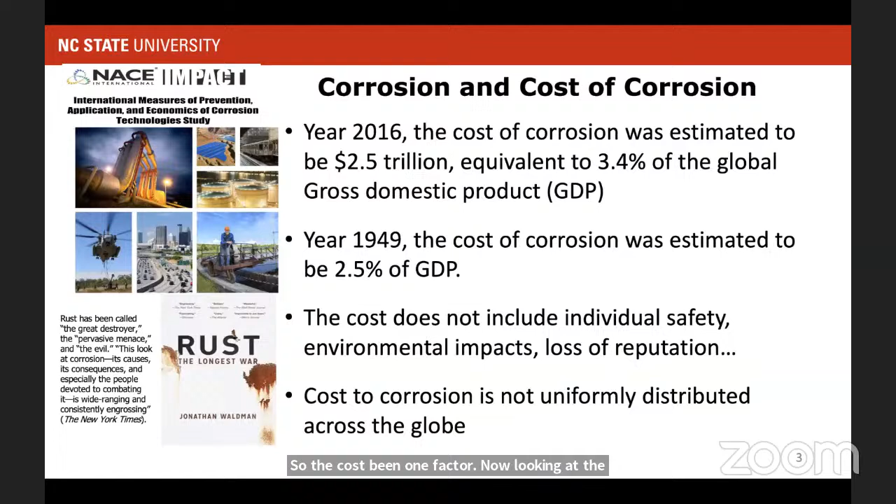Now looking at the sustainable future and environmental issues, and how we can fight global warming and those kinds of issues - a lot of people are working on new clean energy generating systems. From the material perspective, what we really need is material which can give really high fuel efficiency, and the way we can do that is by making the material lighter, for example using magnesium or lighter materials like aluminum. But there are challenges, and corrosion comes in there.

One of the big factors not allowing use of magnesium is corrosion. They're a very active metal and corrode really fast.

Recycling and reuse is really important - whatever we use, we need to be able to recycle and reuse. We think metals are really recyclable, but in reality a lot of metals are not. Looking at aluminum flying in aircrafts, there's so much aluminum flying in the air all the time, and once it comes to recycling, it's really hard. Recycling aluminum into high performing aluminum alloys again is really challenging, and corrosion comes into the picture there - you have iron impurities, and they cause huge corrosion issues. We'll talk a bit about that today.

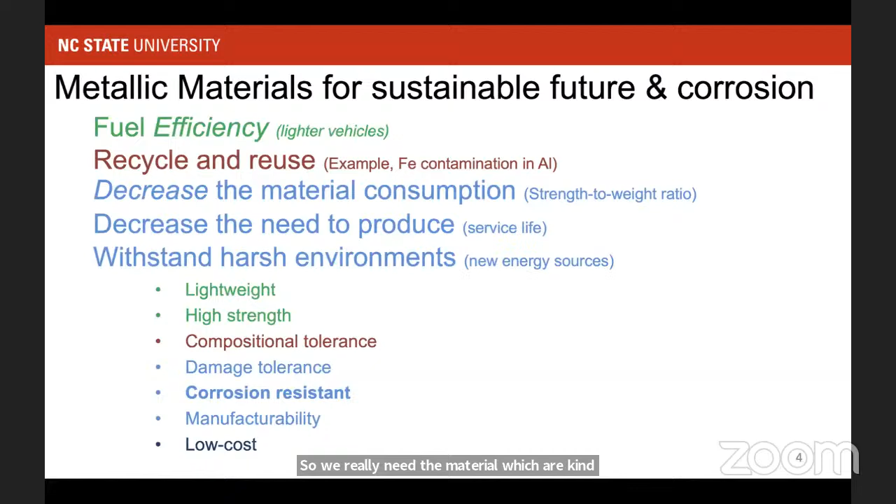So we really need the material which can withstand those corrosive environments. What we need for the future is a material that will be energy efficient and provide what's needed for future energy generation. It should be lightweight, high strength, with huge compositional tolerance. A lot of time we look at a material, but there is a very fixed composition, and a little change in the composition causes a huge difference in the properties. Having such material becomes very difficult to recycle. So having huge compositional tolerance helps in recycling and decreasing the need for a lot of material. It should be damage tolerant, corrosion resistant, manufacturable, and again we don't want to pay a lot of money for that. So we really need materials that go well beyond whatever commercial alloys we have today.

Looking at the options we have, just the pure elements, and looking at density or weight, if you look at aluminum here, you see 2.7 grams per centimeter cubed, which is one of the light metals. Magnesium is 1.84, which is again a good candidate material, but corrosion is a main issue.

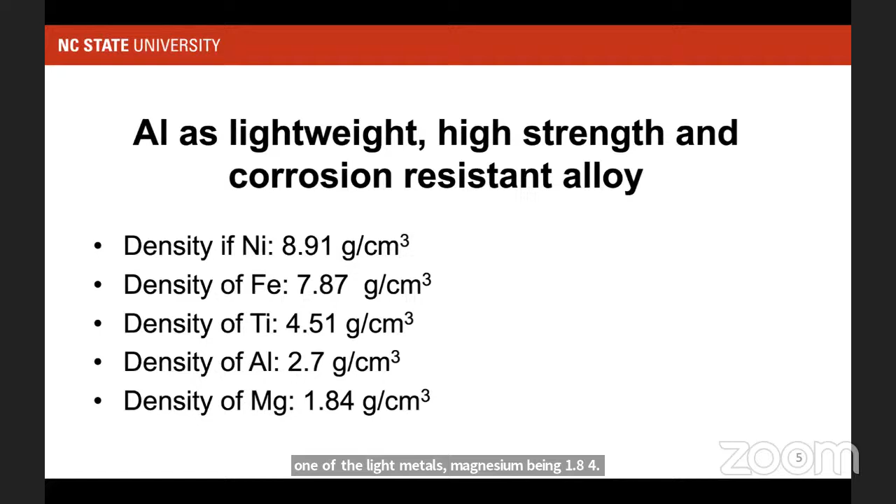So let's look into aluminum, as one example. If I take aluminum and look at its corrosion behavior, aluminum is a very reactive element. If you put aluminum in air, it immediately forms a thin oxide layer. We call it a passive film, and that's a barrier that separates the atmosphere from the metal and prevents the metal from corrosion.

Looking at the Pourbaix diagram on the right hand side, this aluminum oxide, when formed, is pretty stable at very high potentials. But the problem occurs if you have salt present in the environment, like sodium chloride. What that would do is break down the passive film. Once the passive film is broken down, you form a pit that could grow or could repassivate. So these materials are prone to corrosion, but due to that passive layer, they perform okay.

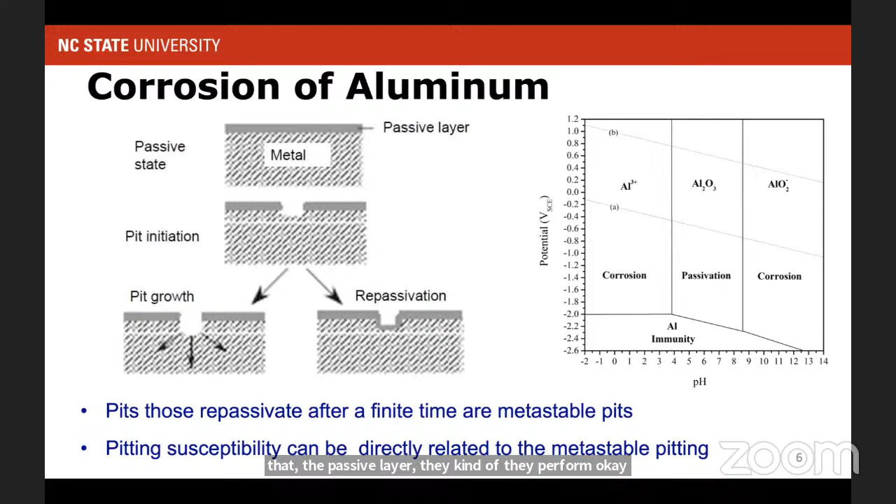You can take pure aluminum and use it in naval applications, and it would be fine. You can make ships out of it and they would be fine. But the main challenge with aluminum is that pure aluminum is very soft. So what we do is, sorry for this busy slide, but what I'm trying to show here is that we try to improve the mechanical properties of this material to make it useful.

Being very soft, with about 25 megapascal yield strength, pure aluminum doesn't allow it to be used in a lot of engineering applications. So what's been done is we develop a huge range of aluminum alloys, divided into 1000 to 7000 series alloys. You see the properties vary from about 70 megapascal up to 380 to 620 megapascal.

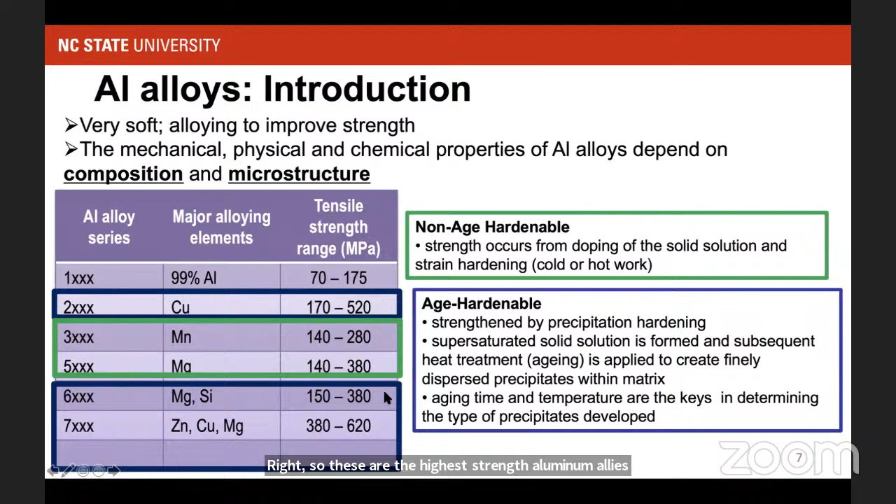And also 2000 series alloys are used in some applications in aircraft, right? So these are the high strength aluminum alloys. Now, the way we get strength in these materials is basically by precipitation hardening. We introduce additional phases. And if I look at this microstructure, how the microstructure varies if I increase the strength of the material. So you can think about this first image here.

If you see my cursor here, that's a pure metal, right? So we don't have any particles present, and the corrosion resistance is pretty similar to what pure aluminum has, right? And now as we add alloying elements, what they do is form some additional phases. You can think about these little particles present. So if I look at the far right hand figure, you see lots of these blue particles present. We call them precipitates. They could be a few nanometers in length scale, and they are closely spaced, and they provide all the strength.

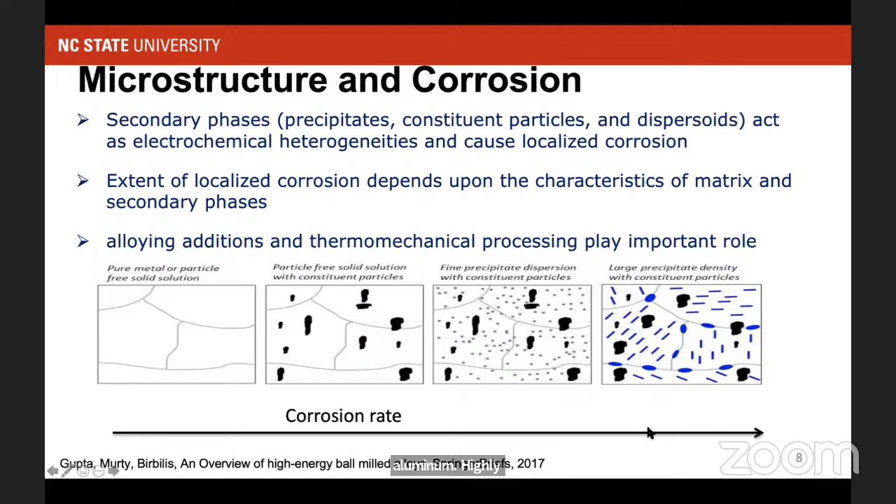So they are needed. But from a corrosion perspective, their electrochemical properties are very different than the matrix, and they interact with the matrix, and they cause localized corrosion, and the corrosion becomes a huge issue. So I take pure aluminum, highly corrosion resistant. I go to 7075-T651 we use in aircraft. That has huge corrosion issues, right? So as we increase the strength, we decrease the corrosion resistance.

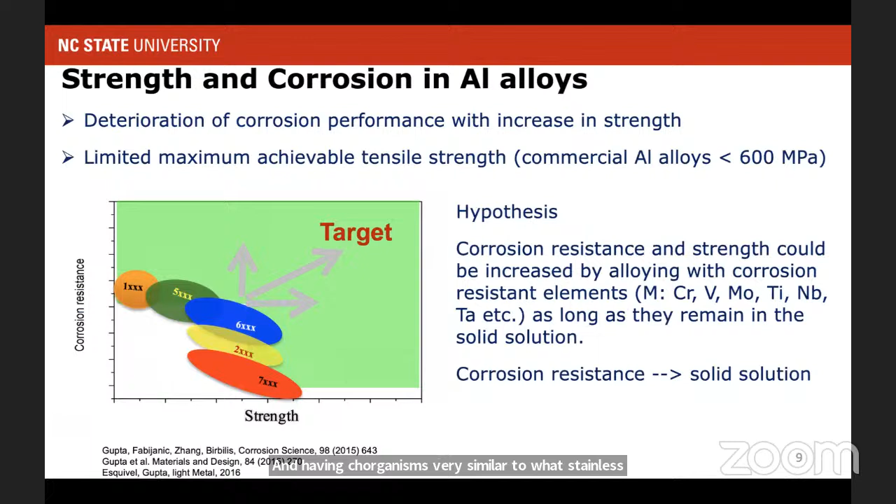So if I plot corrosion resistance as a function of strength, and it's a very qualitative map, what we'll see is that as you go from 1000 series to 7000 series alloys, you're increasing the strength, but your corrosion resistance decreases a lot, right? Now, what would happen if you can make alloys which have really high corrosion resistance, and also very high yield strength? So the target being a yield strength more than a gigapascal, and corrosion resistance very similar to what stainless steels have. And so we put some of our hypotheses together, making a solid solution, and I'll go over it and see what we get, right?

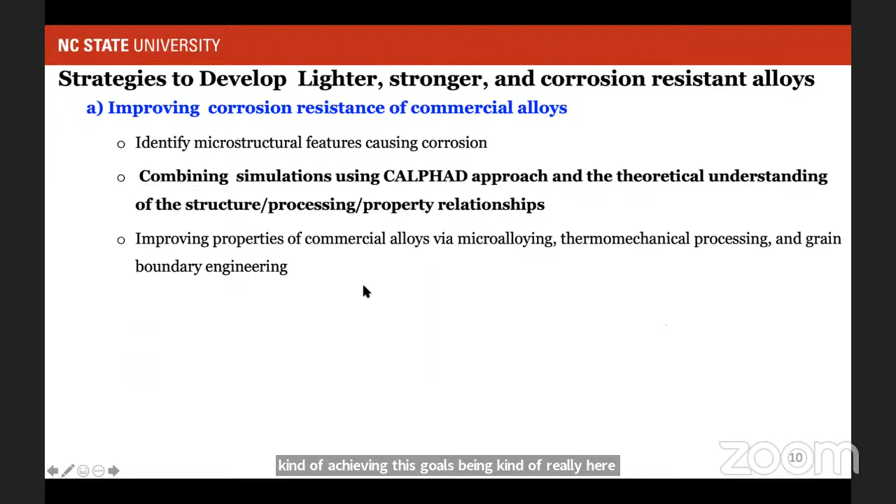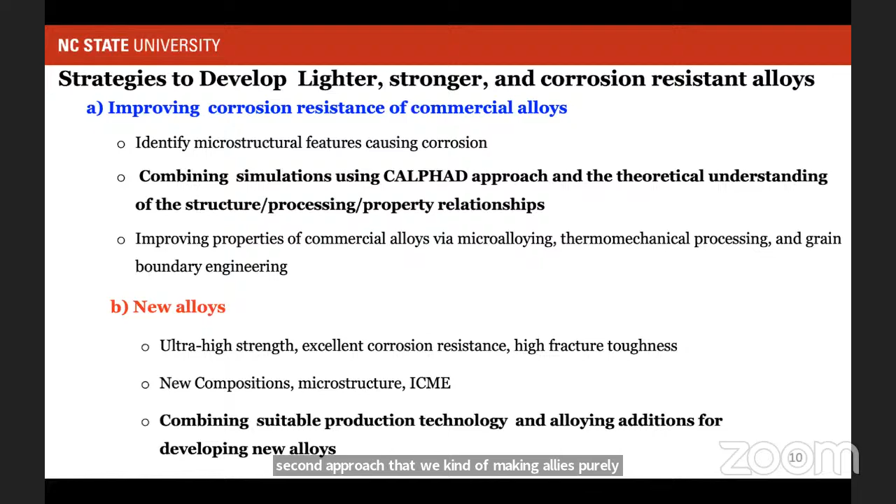But I'll give one example here that shows how we can work on the commercial alloys and solve those very specific problems. So here is one example for 5083 aluminum alloys. This is an aluminum magnesium alloy, used quite a lot in making ships and things like that, right? And this particular alloy has 4.5% magnesium and a little bit of manganese. And the alloy is highly corrosion resistant.

But once we put it in service and the temperature exceeds, say, 50 degrees centigrade, the supersaturated solid solution of aluminum magnesium decomposes, and an anodic phase we call Mg2Al3 precipitates at the grain boundaries, and then the grain boundaries corrode, and you have huge intergranular corrosion issues, right? So what we did is look into the problem, what are the key factors which control the corrosion, and we identified that the size of the particles matters, the composition of the particles matters, and things like that. So we said, how can we solve those specific microstructural problems and enhance the corrosion resistance?

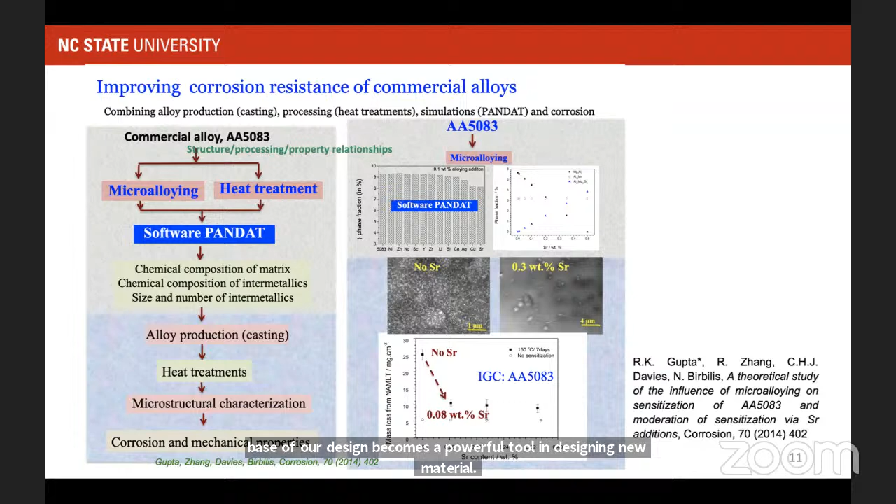So that shows how we could improve the corrosion resistance, and these thermodynamic calculations combined with our knowledge-based alloy design become a powerful tool in designing new materials. But again, in these cases, we're making incremental changes in the properties. Now, making a huge difference and going to the property limit, which we suggested as a gigapascal of yield strength and corrosion resistance similar to stainless steel,

we started looking at a whole new compositional range, and I'll give an example. Can we think about stainless aluminum? Think about iron chromium alloys, which are the base for most stainless steels. In iron chromium alloys, iron doesn't have good corrosion resistance, but chromium is very corrosion resistant. At the same time, chromium is a very active metal, right? As you put it in air, it forms a chromium oxide layer immediately.

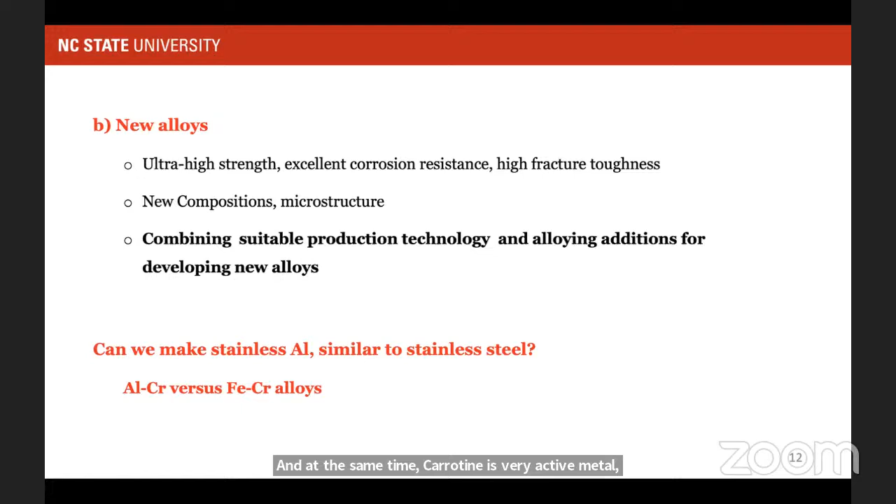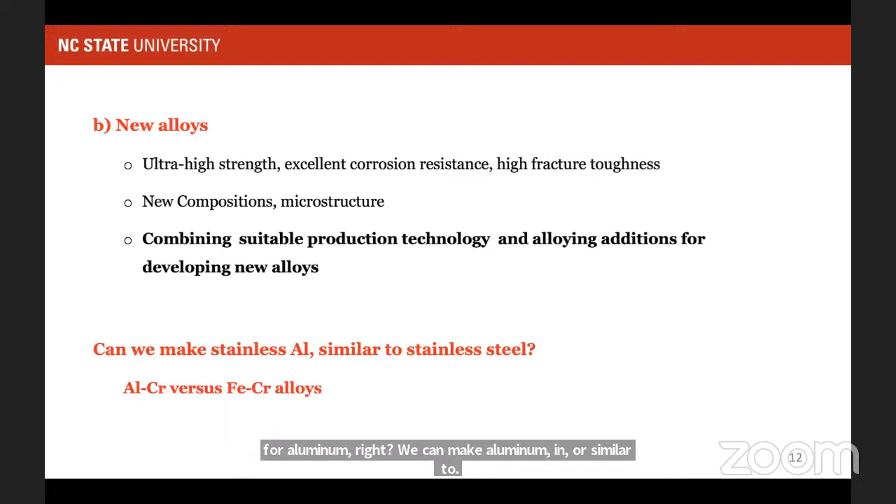Now, if I make iron chromium alloys, iron dissolves, chromium stays as chromium oxide on the surface, and eventually forms the chromium oxide layer that gives all the corrosion resistance. So it should be a simple phenomenon. We can do that for aluminum, right? We can make aluminum chromium alloys, similar to iron chromium alloys, a whole aluminum series. But the problem here, looking at the phase diagrams, say aluminum molybdenum or titanium, the biggest problem is the solubility of these elements, right?

So what we did was take the whole periodic table and put in the maximum solubility of different elements. It's a color coded map. Let's take one example like chromium here. The maximum solubility of chromium is like 0.77 weight percent. Vanadium is 0.4 weight percent, and these are the maximum solubilities. For example, vanadium's maximum solid solubility is 0.4 weight percent. If I go to room temperature, this drops down to like 10 to the power minus 7 atomic percent.

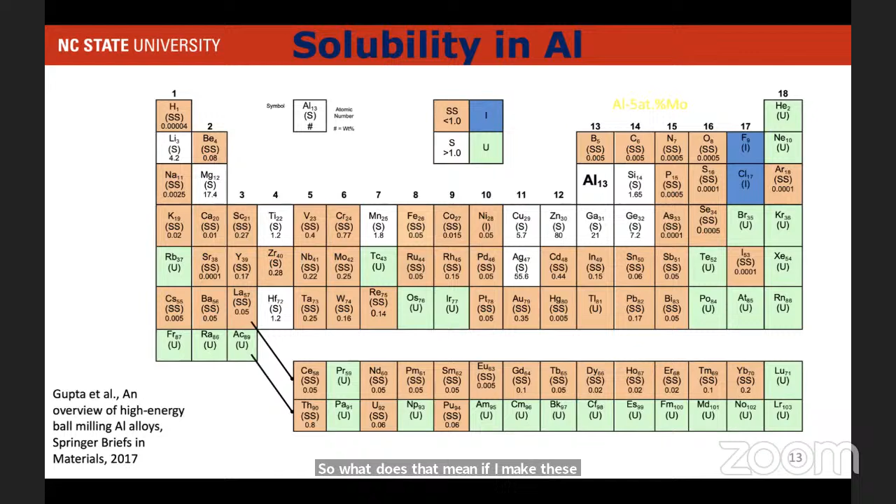So what does that mean? If I make these alloys, these elements won't stay in the solid solution. They make some sort of precipitate. So just for demonstration purposes, we made a bunch of alloys like aluminum with 5 atomic percent chromium, titanium, and things like that. What you see is the matrix here, the gray, and the little brighter intermetallics, and they are really big intermetallics. So if I make these alloys by casting, all the matrix would be corroded, so they're not going to be very useful.

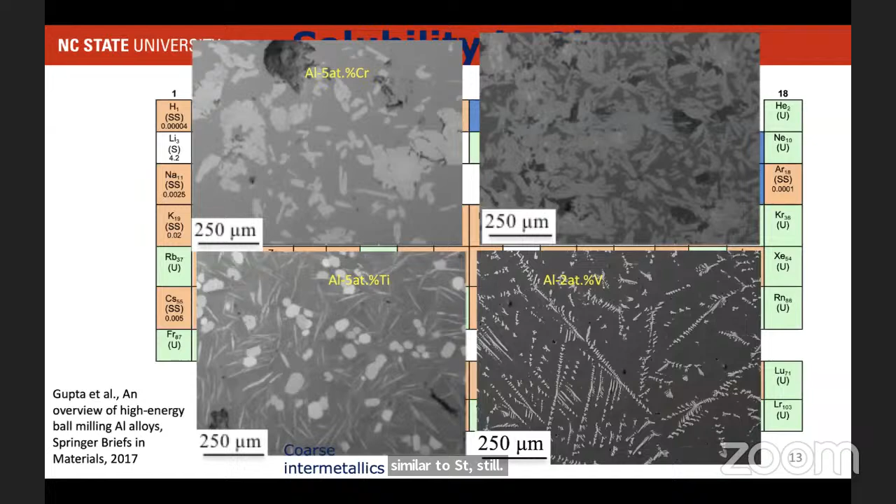Now, the hypothesis is if we make these materials in solid solution somehow, we could probably get good corrosion resistance similar to stainless steel, right? And also good mechanical properties. I'm not talking about that, but I'll be happy to talk about it later on. So to make the solid solution, we know there are different techniques. One could be ball milling, mechanical alloying, where we can put huge energy in and make a non-equilibrium supersaturated solid solution.

So with that hope, we took these metal powders, put them in a jar, and sealed them in a glove box in a high purity argon atmosphere. Later we learned that you really don't need a high purity argon atmosphere, and having some air could even be beneficial. But anyway, to have a controlled atmosphere and to understand the properties very well, we do all the processing in high purity environments.

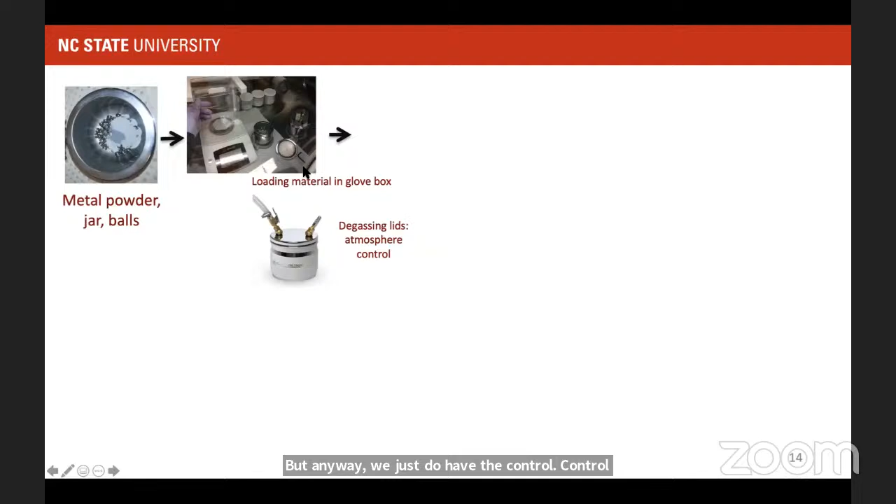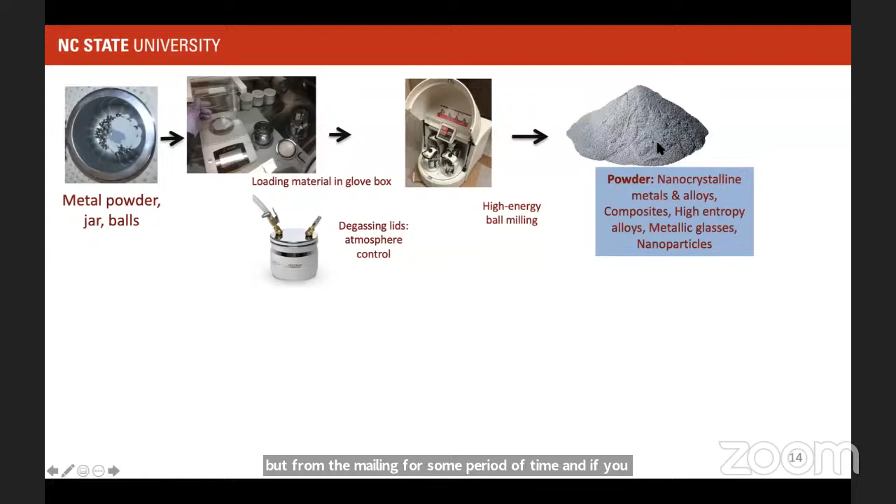So anyway, we load the jars, we put them in the ball mill, the simple system, and perform the milling for some period of time. And if you are lucky, we get the powder like that. And if you're not, what might happen is that all the jars are coated with the powder and things like that. And then cleaning that powder is kind of a challenge.

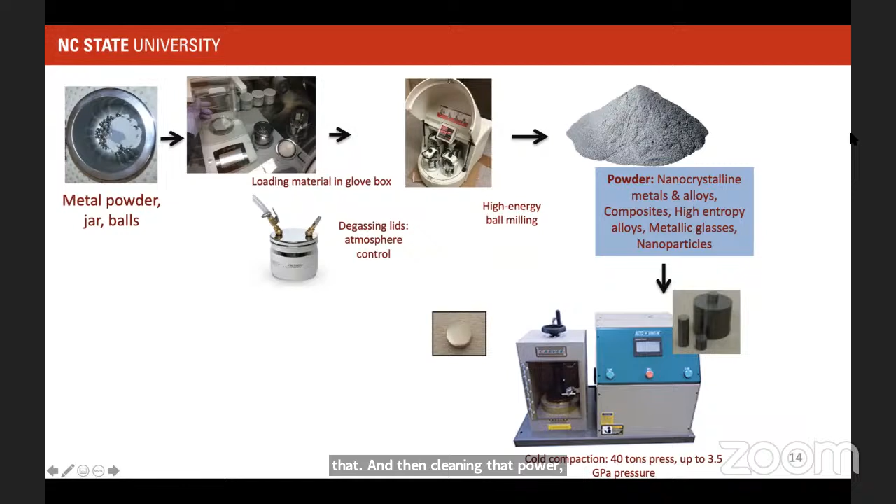Once the powder is made, we can use cold compaction, sintering. We can use spark plasma sintering. So depending on what we want to do, we have different methods to consolidate and make our samples. So if you look here, our samples more or less look like that. We make small pellets and look at the properties. And also we can use this powder for additive manufacturing. We could use the powder for cold spray and a variety of applications.

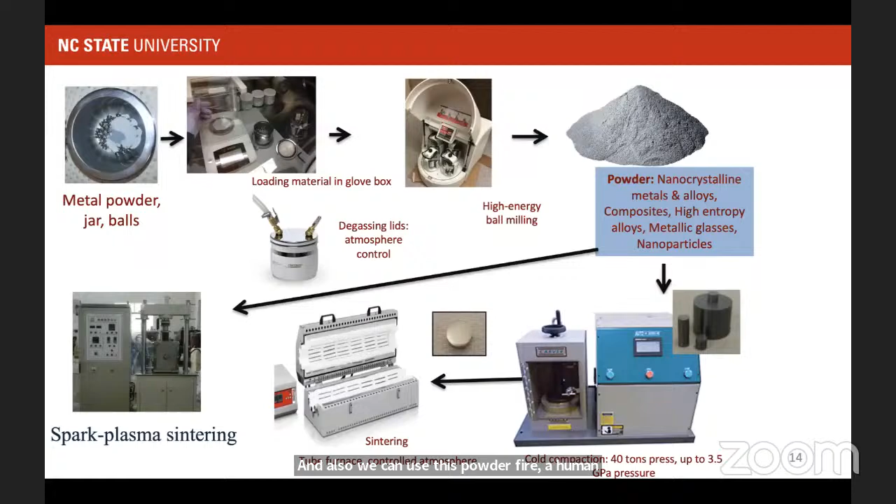Anyway, given the time I have, I'll quickly go through a few results here. So these are SEM images of all these different alloys we made. This is just an example of 8 alloys. We have a lot more alloys by now. And what you see here is if you look at aluminum and niobium, you don't see a lot in the matrix, right?

Looking at, say, aluminum titanium, for example, you start seeing a few bright particles here. In aluminum, chromium, and manganese, you see quite a few bright particles. Those are intermetallics or undissolved solute, right? But if you look, this length scale is 2 micron here. So they're really small particles, right?

And just to compare them, if I make them by casting, a different route, the microstructure looks something like here, right? And you see like 250 micron. So they're really coarse intermetallics. And if I don't have that, you see those alloying elements are really uniformly distributed.

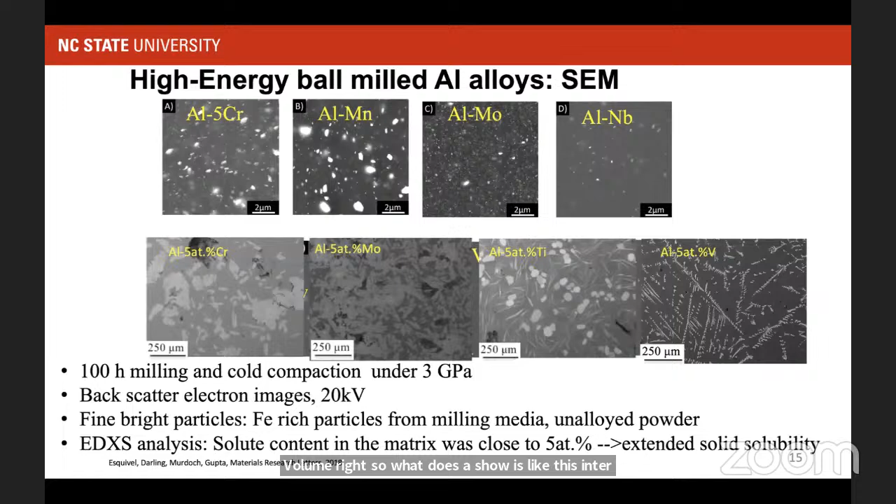And if I do EDS analysis here, composition analysis in a volume, which could be around 5 micron in diameter, you might see all of these alloying elements are in the solid solution, within that 5 micron volume, right? So what that shows is these elements are very uniformly distributed in the matrix. We further did some TEM and XRD analysis, which confirms that.

So this is just to show you how the material looks. This is the powder, the SEM images for the powder. And if you do SEM, in this particular alloy you have a few intermetallics present here and there. You have some impurity like iron-rich intermetallic. Otherwise, all the solute is uniformly distributed.

We do TEM, and it's a really small length scale now, and you can see that we start having a pretty complex microstructure. Initially, we thought it's going to be all uniform, but we see vanadium solute-rich and solute-lean regions. We also use a process controlling agent which introduces carbon and carbon impurities and things like that. So the microstructure is pretty interesting. At micron scale, it looks pretty uniform. At nano scale, there are lots of heterogeneities.

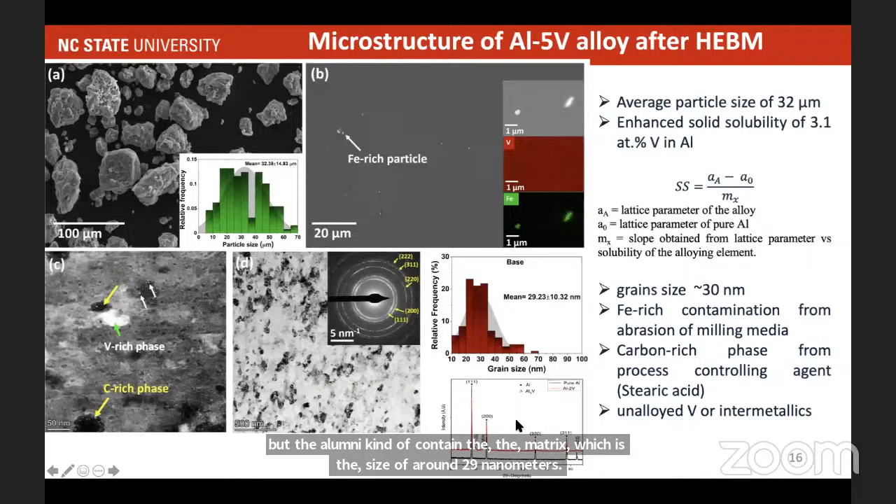But the alloy contained the matrix with a grain size of around 29 nanometers. It has very high solid solubility of vanadium, of the solute, right? So we further looked into the grain size, comparing grain size of all these different materials and how much solute went into the solid solution.

So on the y-axis, these blue bars are showing the grain size. So you see that the grain size remains always below 100 nanometers and varies depending on what solute we use. The solid solubility of those solutes again varies, but in the case of moly, for example, around 3.7, 3.8% of the added solute was in the solid solution.

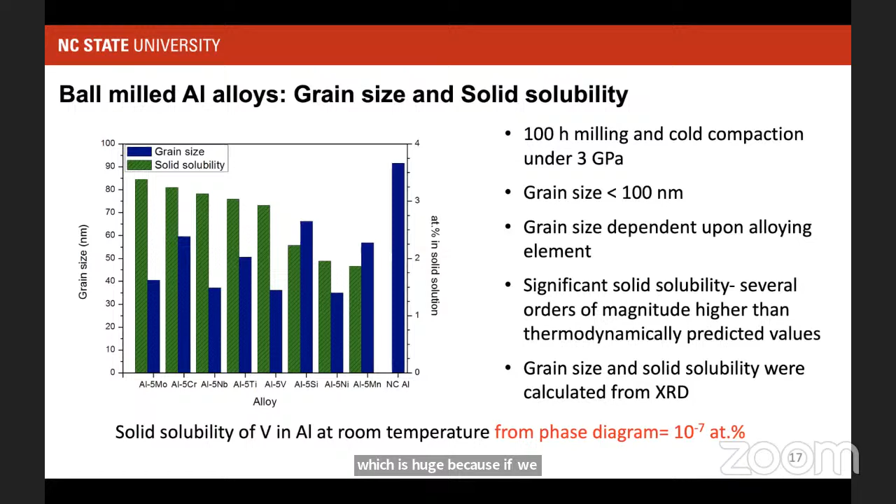So we added 5 atomic percent, and out of that 3.8% is in the solid solution, which is huge, because if we predict that from the phase diagram, these are insoluble elements, right? So you have like 7, 8 orders of magnitude higher solid solubility.

Anyway, now looking at the corrosion, the way we were looking at that was looking at the pitting potential value.

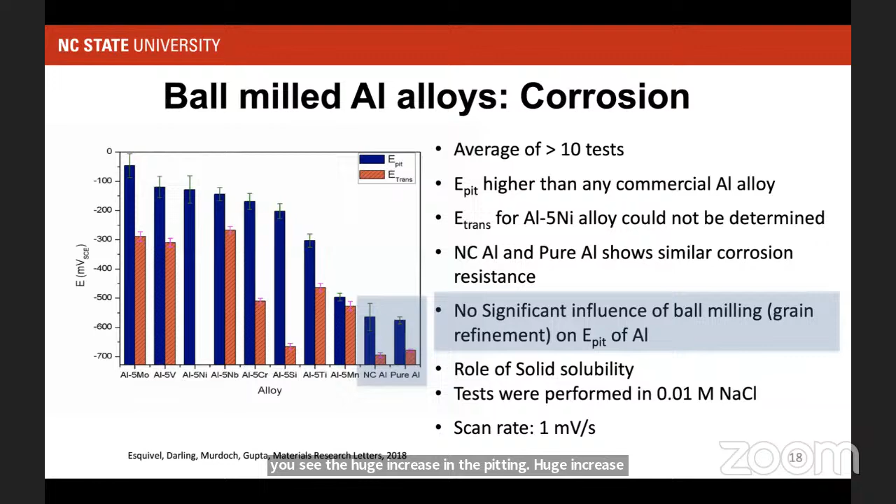So if I compare the pitting potential of that with aluminum vanadium, for example, you see the huge increase in the pitting potential, huge increase in the transition potential. So what that basically indicates is that these materials, the ball mill materials, have really high corrosion resistance, right?

Now, what we did was just to see how those numbers vary if I expose these materials in real time, if we want to use them in, say, environmental exposure, in seawater and things like that. So we immersed these alloys in 0.01 molar sodium chloride for 6 months, and we were monitoring the growth of the localized corrosion, the growth of the pits, right?

And here for comparison, we took the commercial alloys and pure aluminum, which are the commercial alloys that are really corrosion resistant. If I take 7075, those high strength ones, there the pit depth would be really, really huge. But even comparing those corrosion resistant alloys with the ball mill alloys, you see there is a huge difference. In the ball mill materials, the pits form initially, but they don't grow.

So if I analyze those pits, you see in the first few days those pits have grown, and then they are pretty much constant. There's not much pit growth. So what it shows is these materials are actually corrosion resistant, and it verifies whatever electrochemical data we get.

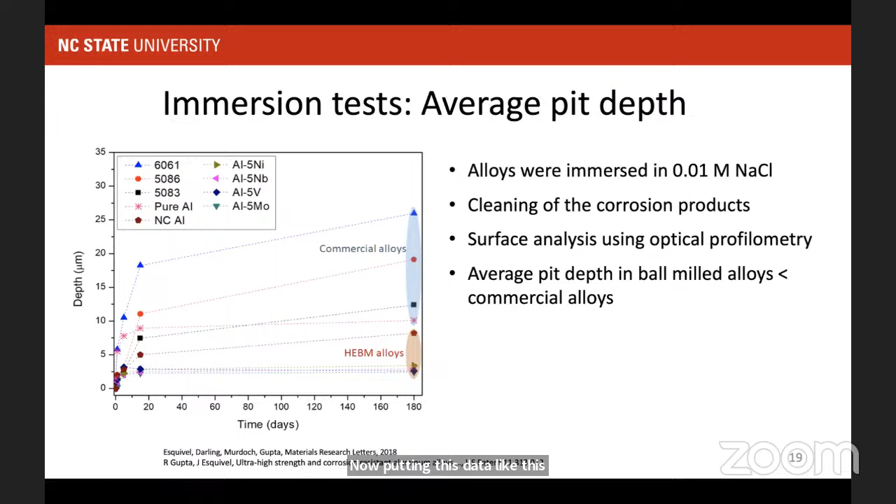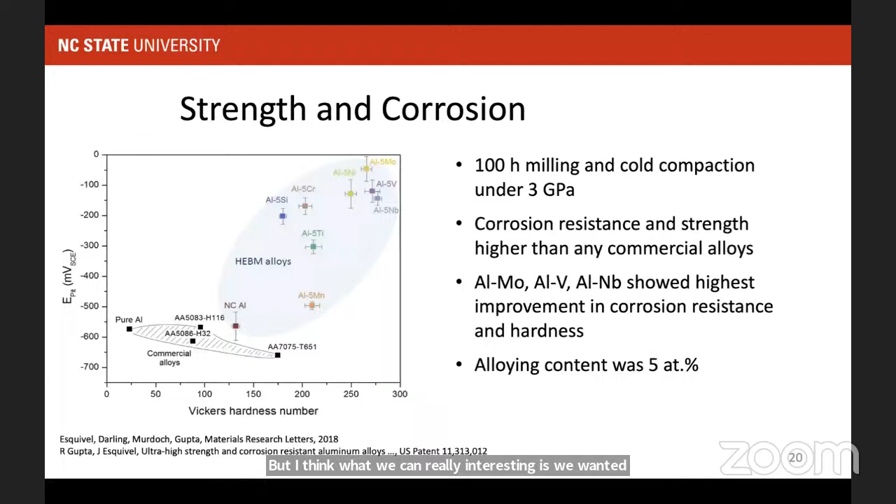Those materials could be made, and of course, further work could enhance the corrosion resistance. This is the work we did in 2018 actually. Right now, we have a lot more alloys with really better properties. But what becomes really interesting is we wanted to understand why that happens, right? And understanding this fundamental mechanism would also help us in designing our strategies for future material development.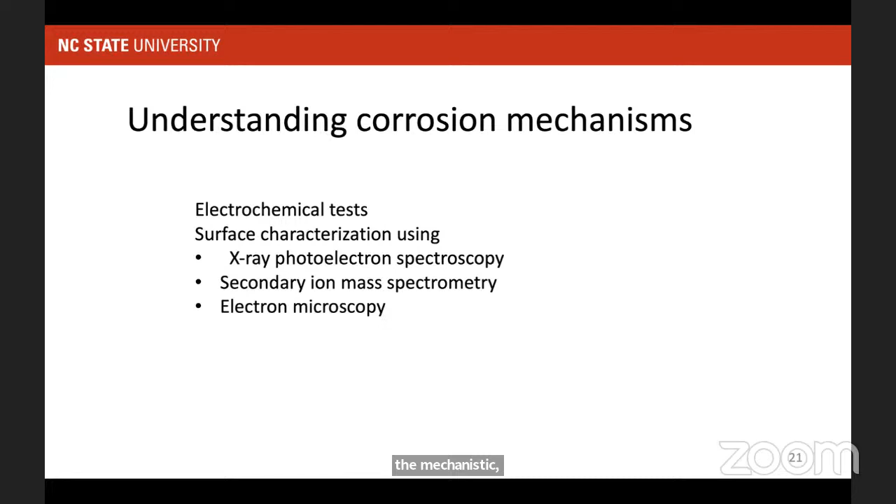So I would probably not go through all the studies we did to develop mechanistic understanding. I'll show a few really cool ones. So I would show you some of the work we did with TEM, transmission electron microscopy, to try to understand the corrosion mechanisms, right? And the use of transmission electron microscopy in studying corrosion is also a pretty new thing. So I'll give you a few examples.

So what we do is very simple experiments. We take our material, we put it in a corrosive environment or do a certain corrosion test. Say, for example, sometimes we want to study the passive film and we want to exclusively grow the passive film, where the maximum thickness would be like 10 nanometers or something. So we have those passive films on the metals either after electrochemical tests or after simple immersion tests, right? We take them to a focused ion beam.

We deposit a platinum layer on top to protect the material we're going to make a TEM specimen out of, and we make a trench around it on both sides, and then we make this thin specimen there, and we lift it and take that very thin sample to the TEM, right?

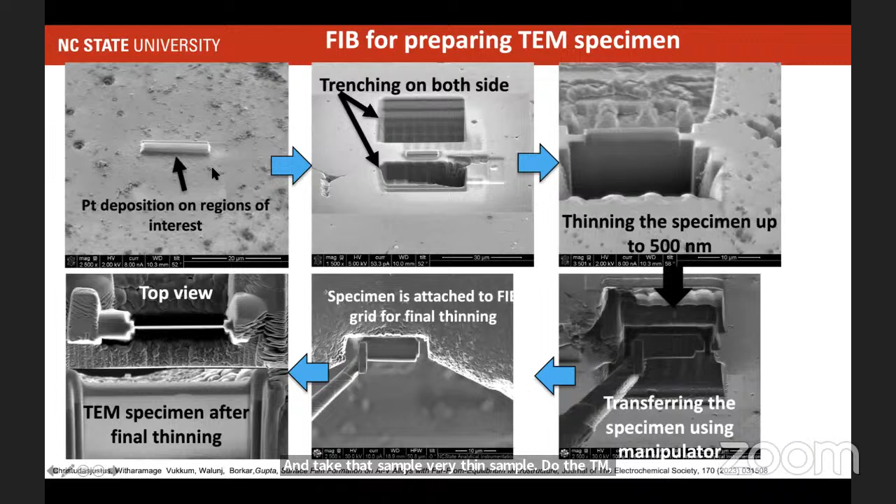So what we're doing basically, think about this is my sample, and we're looking at the cross section of the sample, right? So now here is how the passive film looks like. So this is aluminum 5 vanadium alloy. These are kind of two examples. One is just taking the material and putting it in air, right? We prepared the material and this had been stored in the glove box.

And even in that high purity environment, as we discussed, right? I mean, taking pure aluminum, you keep that in air and you immediately form an oxide film on that, right? So that's the oxide film we talk about. So we haven't done any electrochemical test on them, just in the air, and you see like 5.3 nanometer kind of surface film forms on that.

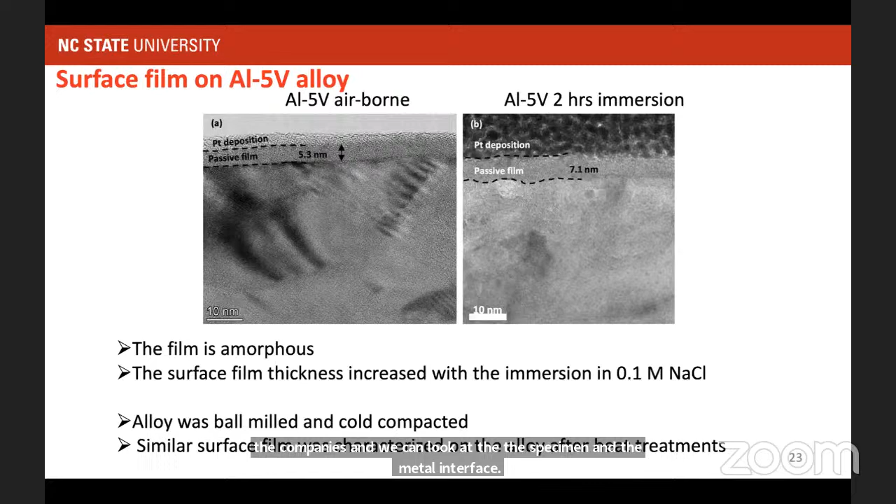And same thing here, after 2 hours immersion, there is a little growth in the surface film, like 7.1 nanometers, and it kind of starts becoming a little uneven. So you have those surface films. So basically, we can see that surface film, and then we can study the different characteristics of the surface film. We can look at the crystal structure, the composition. We can look at the passive film and the metal interface. I mean, it's challenging. It's not an easy job to do, but we have the opportunity to do all the stuff, right?

So looking at how this composition looks like, one thing we really realized was, if you look at these figures here, look at the one I'm showing here with the cursor. So it is a 5.3 nanometer thick passive film, and the way we verify whether it's oxide or what that is, there is a huge amount of oxygen present. So there should be either oxide or hydroxide, and things like that, right?

And now looking at here, you see that aluminum enrichment, kind of this aluminum rich region outside, right? This is the matrix where there is a huge aluminum rich region, and outside then you see kind of the aluminum lean and then aluminum rich, and then we see a vanadium rich region, and we superimpose. What we really learn is that the outer oxide is aluminum oxide, and the inner region is rich in vanadium, and all this vanadium is not oxidized. That's kind of metallic vanadium. So we learned that vanadium kind of segregates just below the passive film, right?

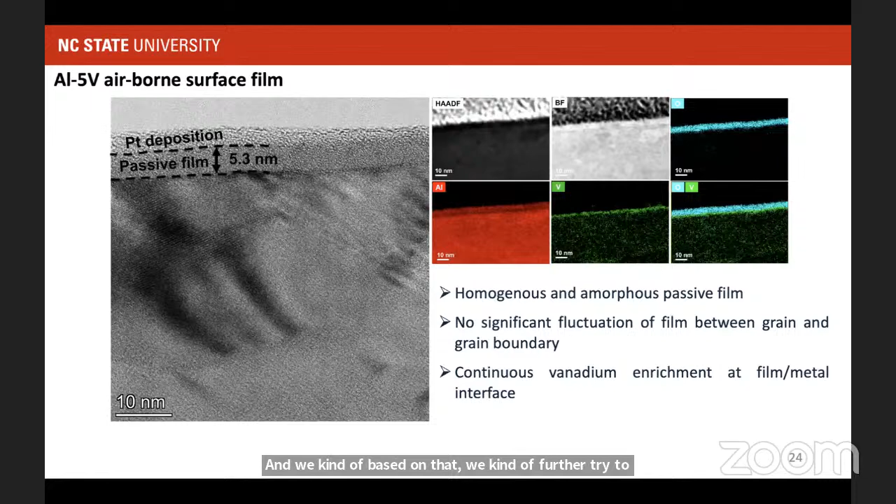Our initial hypothesis was something different. We initially thought that you would make an exclusive vanadium oxide layer and that would prevent corrosion. So that wasn't the case, but you at least have the segregation of vanadium, and based on that we further tried to understand what the quality of the passive film would be, and we understood quite a lot. Probably we don't have time today to go into all the details. Another thing we learned was, and I'll talk a little bit about that too later on.

We looked at where the corrosion initiated. So this is one example. Again, you see there's 500 nanometer, and this region over here is a corrosion pit, right? So we have the background of the passive film, and we start forming those pits, right? And now, if I look very closely inside the passive film, we have some regions where I think some particles have fallen out, but we were able to isolate a particle which is iron rich, right? And we know that these iron rich particles cause the corrosion in these aluminum vanadium alloys.

This iron is coming as an impurity. The milling media we were using was stainless steel, so some of that is coming from there, right? So we detected that, and the other thing we found was that there's lots of vanadium on that iron rich particle. So if I find an iron rich particle inside the matrix and do the EDX analysis, I won't find vanadium and aluminum together, but we always find vanadium on top of these particles when we're looking at the pits or regions close to the passive film.

So that kind of verifies one hypothesis we put forward in the beginning when we were designing the alloys, that the vanadium would be dissolving inside the pit, and as it dissolves, it makes vanadate, and vanadates are very well known corrosion inhibitors, right? So what those vanadates do is basically deposit on those iron rich particles, and as they deposit on the iron rich particles, they shut down their cathodic activity.

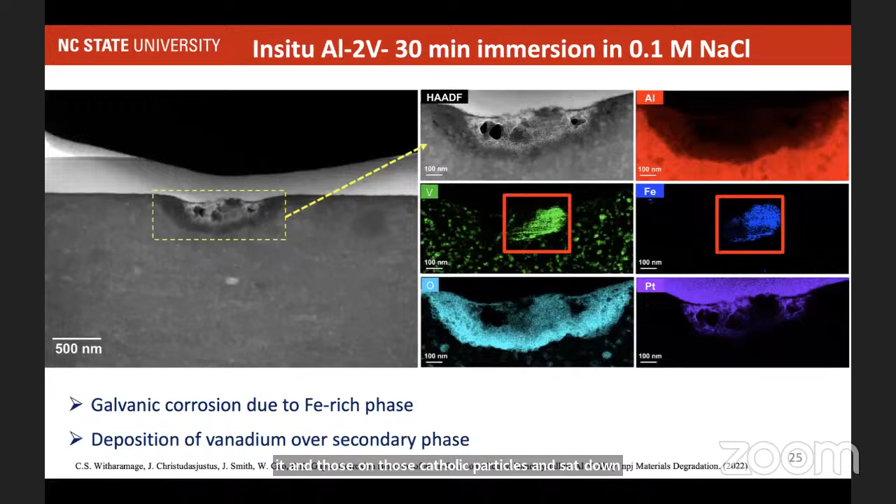If you don't have enough cathodic activity, you cannot have the critical pit solution needed for pit growth. So you can have lots of pits forming, but they don't grow because vanadium could redeposit on those cathodic particles and shut down the corrosion as it initiates. That helps in understanding future alloy design strategies.

We have a number of corrosion mechanisms, but I probably won't go through all of them. I'll just skip that.

Another thing we learned came from different work on aluminum based alloys. We made some aluminum iron alloys, and our thought was that aluminum iron alloy may not give good corrosion resistance. We just wanted to see how bad the corrosion resistance would be. But when we looked into that, we got surprising results, in the good sense. We had really good corrosion resistance.

One thing we learned from that work, applicable for a lot of alloy development, is conventionally in aluminum alloys, if I have an intermetallic present, say an iron rich particle, the matrix corrodes along it, and that iron rich particle, whether it's a constituent particle or an inclusion, serves as a local cathode, and everything else around it corrodes. Now, if I have the same amount of inclusion but distribute it everywhere in the matrix, like the situation on the right hand side, what could happen is that a pit could form.

Once your pit has formed, inside the pit you have lots of cathodes sitting, and those cathodes, due to their cathodic activity, would produce lots of hydroxyl ions. Now, one necessary condition for pit growth is that the pH has to be really, really low, like 5 molar HCl in that local environment inside the pit. What these small cathodes could do is never let that situation occur, so the pit would not grow. I guess this mechanism is pretty useful.

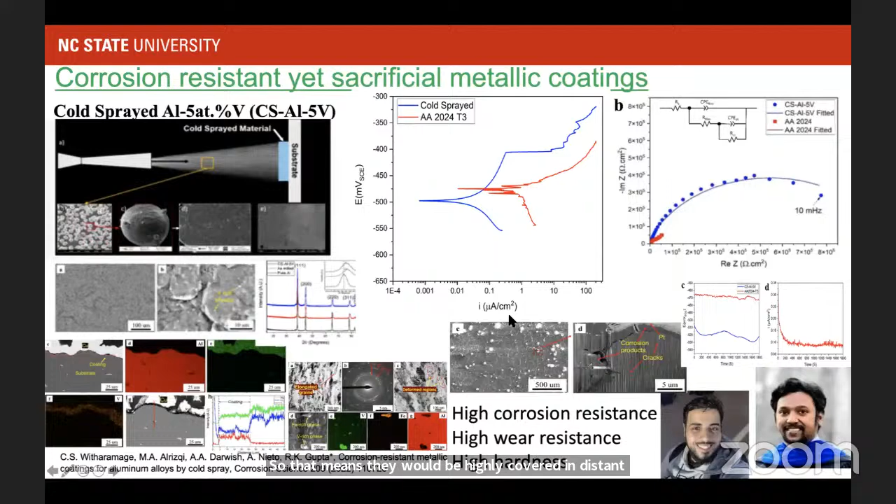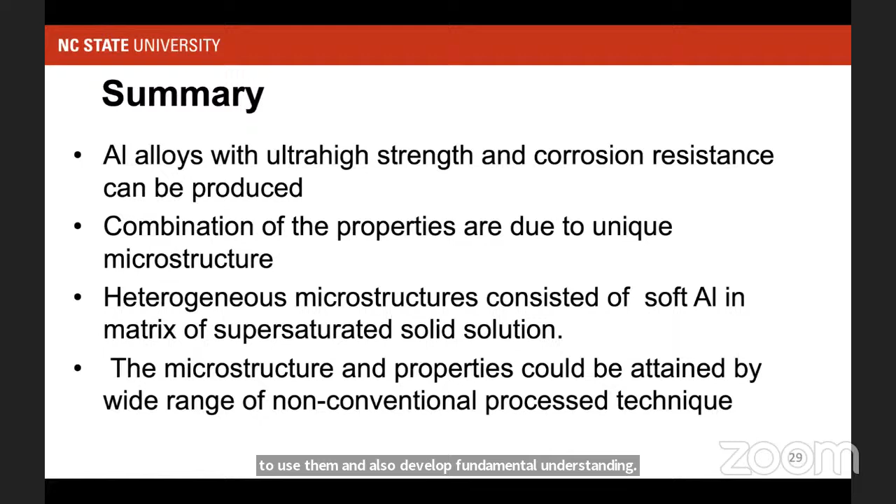So I guess in summary, making these aluminum alloys by processes like ball milling and so on could be very powerful techniques. Now I think we have the capability to make the material. We just have to think about how we're going to use them and also develop fundamental understanding and improve their properties. Of course there are lots of challenges, we cannot just stop, there are a few properties we need a lot more work on.

So that was one example. I think we still have some time, so I'll give just one more quick example, let me know if I'm running out of time. One quick example for additive manufacturing.

We all know additive manufacturing is being used quite a lot these days, a lot of interest there. As the video shows, here's a laser powder bed fusion method. What we do is have a CAD model of the design you want to print, feed that to the computer, and based on that there's a laser which hits the powder bed.

It prints a layer of that component, then you lower down the platform, put a new layer of the powder, and repeat the process, and you get the 3D printed parts. A lot of you would probably be familiar with additive manufacturing already, so I'll just talk about it real quick.

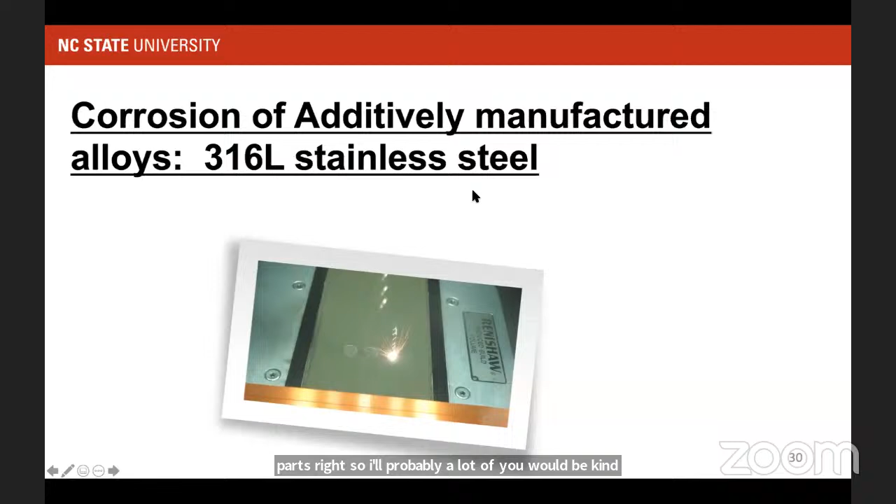Now looking specifically at additively manufactured stainless steel, this is just one example, a specific example, but the concepts can be used in many materials. If I look at 316 stainless steel and the factors which influence corrosion, of course the material, the composition, the microstructure, and what kind of defects are present there are the main factors which influence corrosion.

Now looking at the whole AM process, there are lots of variables. You have a feedstock where you start your material, a wide range of AM parameters like LPBF, you often do post-processing treatments, and those could be different types, with different processing parameters, again a huge amount of them. All these influence your corrosion, and again you have different kinds of defects present.

You have different kinds of microstructure coming up.

When we look into the literature and the properties of these materials, taking just one example for corrosion property, we see a huge body of literature showing that AM improves corrosion resistance. But there's also huge literature saying that if you do AM, your corrosion resistance would decrease. So there's a huge discrepancy in the data present.

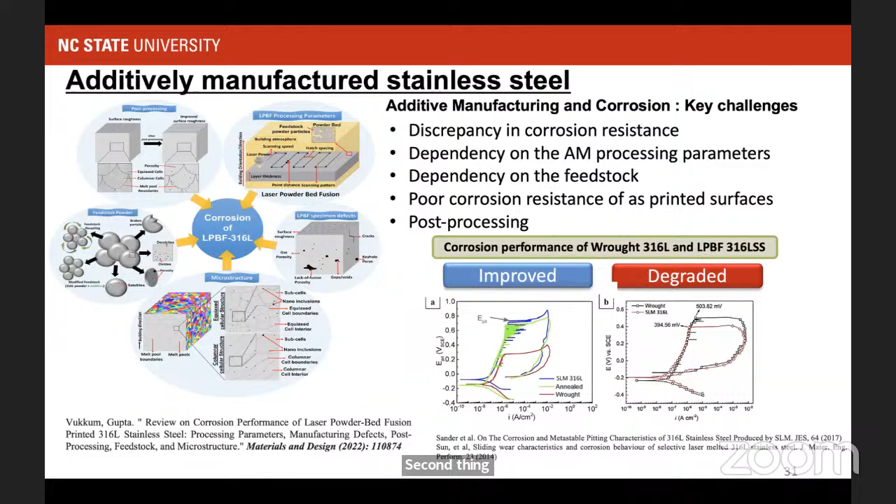So one thing we wanted to do is understand why there could be discrepancy in the data. Second, can we really improve the corrosion resistance? Take this opportunity of having this new tool and really improve it. So we started with this motivation: avoid post-processing, improve reproducibility of properties, and increase corrosion resistance.

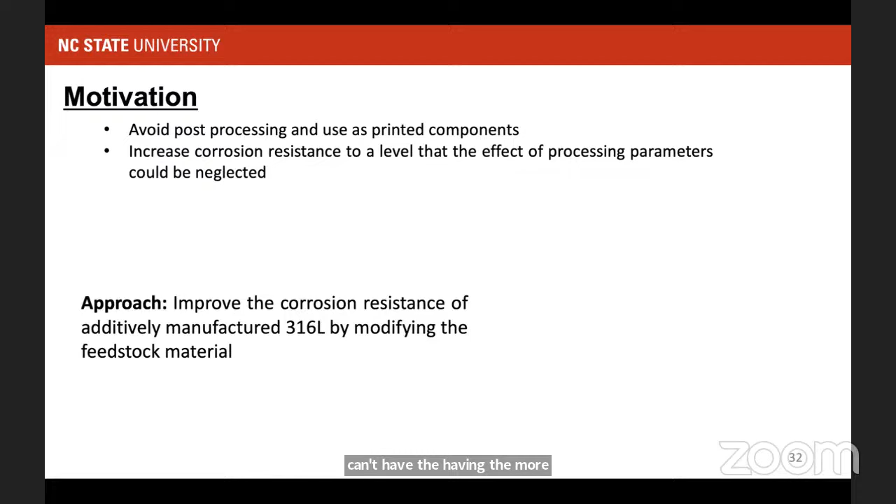So what can we basically do? We thought our starting powder is really important - that's 316 stainless steel powder. So we can use certain additives.

The thought was, if I add an additive that can carry nitrogen, I can make stainless steel with very high nitrogen content. Otherwise you won't be able to make them. People did a lot of work on high nitrogen containing stainless steels, but the challenge is the solubility of nitrogen is very limited.

Now what's unique about AM processes is the temperature goes very high, and the solidification rates could be very high - like 10 to the power 7 Kelvin per second. So huge solidification rates mean you can dissolve that nitrogen in the material, and then retain it too.

We developed the idea for high nitrogen containing, more uniform microstructure, and then we learned that actually you don't necessarily need uniform microstructure and all that.

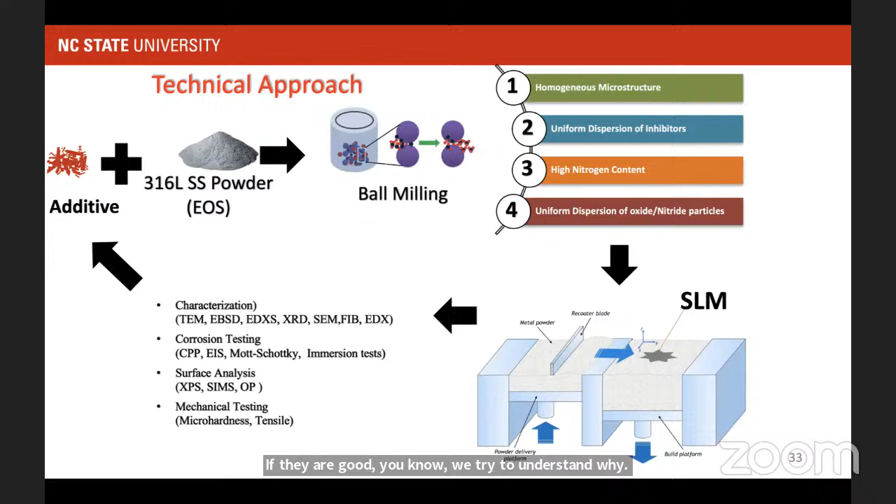So what simple thing we did was take those additives and mill them with the 316 stainless steel powder. We buy them from commercial vendors, mill them, then make our 3D printed coupons and look at their properties. If they are good, we try to understand why, what the mechanisms are. If we didn't get the result, we try to understand what happened, and then repeat the process. So there's lots of experimental work.

I'll show you one example. When we make the powder, we mill it, but our aim is that during the milling process we don't want to change the morphology of the powder at all, because for AM you need spherical particles and a certain size distribution. So we don't want particle morphology to be affected, and we optimize our milling parameters so that we're not doing that.

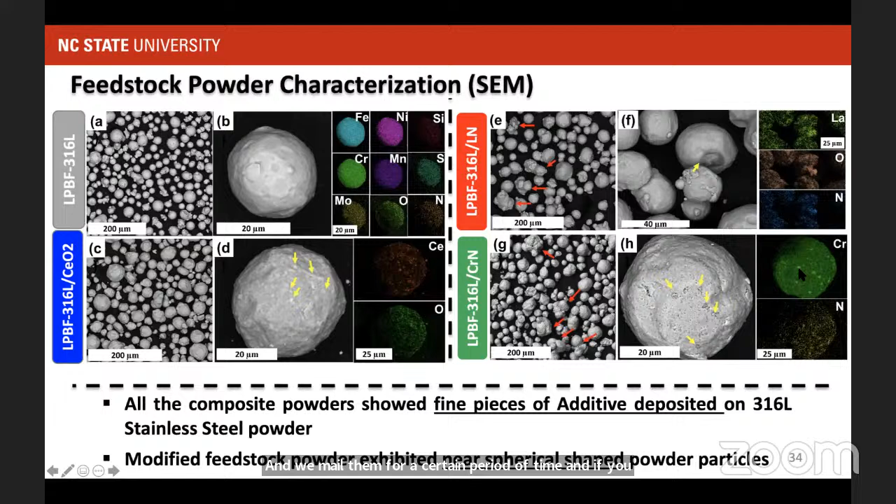So what we do is take the additives - in this case cerium oxide, lanthanum nitride, chromium nitride - and mill them for a certain period of time. If you look at those individual powders in EDX analysis, you see the particles coated with chromium or nitrogen, whatever additive we put in. So we get that powder, and here I'm giving you one quick example for chromium nitride.

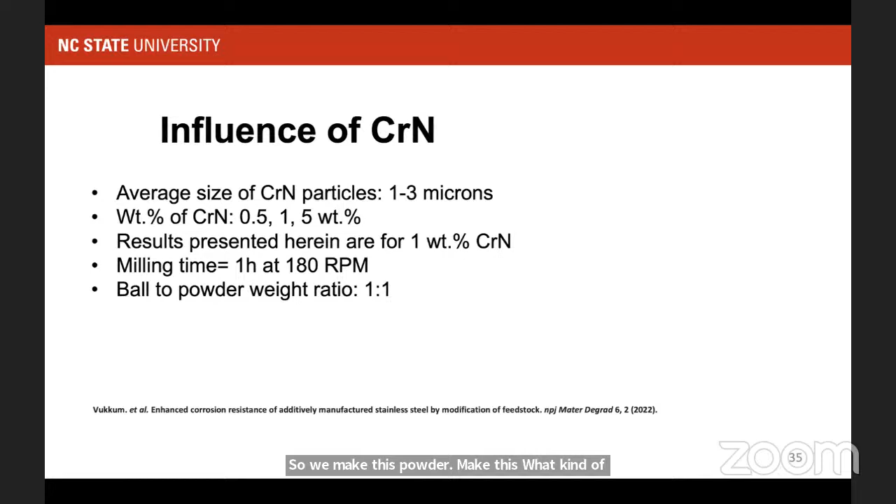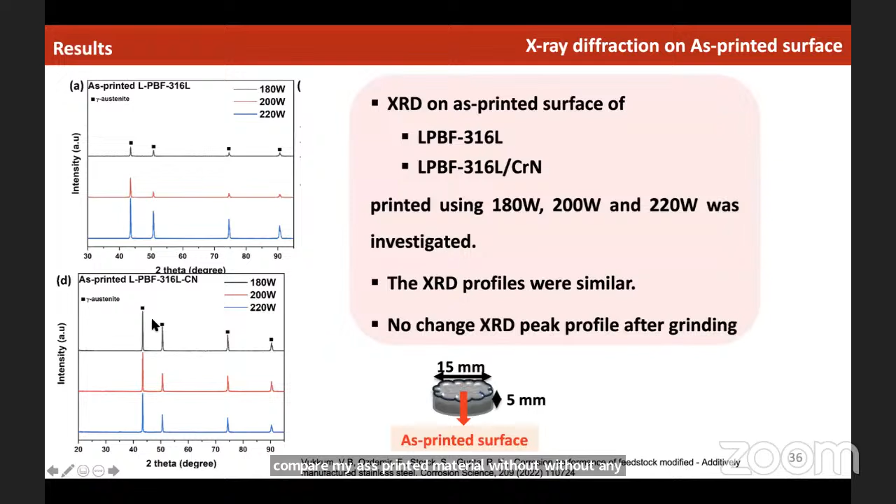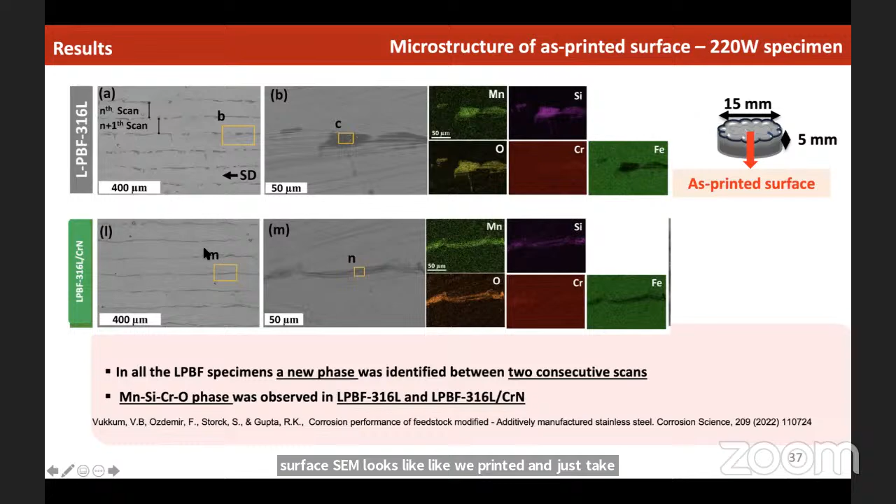We make those chromium nitride modified powders and use them for 3D printing. Comparing my as-printed material without chromium nitride to that with chromium nitride using XRD, we get similar data. Looking at the top surface - this is the way the top surface SEM looks when you print it and just take the as-received surface - they look pretty similar, with similar oxide forming and all that stuff.

Now we start looking at the cross-sectional microstructure, side by side, one material printed with 316L, another 316L with chromium nitride. Looking at the melt pools and all that, we see pretty similar microstructure. The difference starts showing up when we do really careful, high resolution SEM characterization. We start seeing subcells present - you have a cellular structure, and inside the cells you have subcells, and the subcells are pretty refined when I add chromium nitride.

Another thing we see is the cell boundaries. Cell boundaries are pretty thick in the case of 316L without chromium nitride. Chromium nitride kind of refined them. These are kind of the differences we've seen, other than that not really a lot.

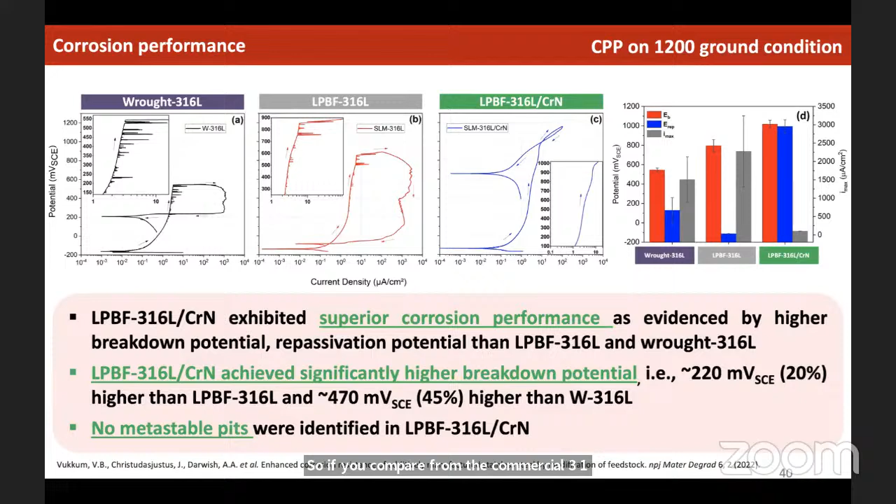So what we're looking at basically is again the pitting potential. I understand that a lot of people will not know those polarization graphs, but what we have is a really high pitting potential, really high repassivation potential. So if we compare with the commercial 316L, pretty similar chemical composition, but totally different corrosion performance. So these materials are very resistant to pitting corrosion.

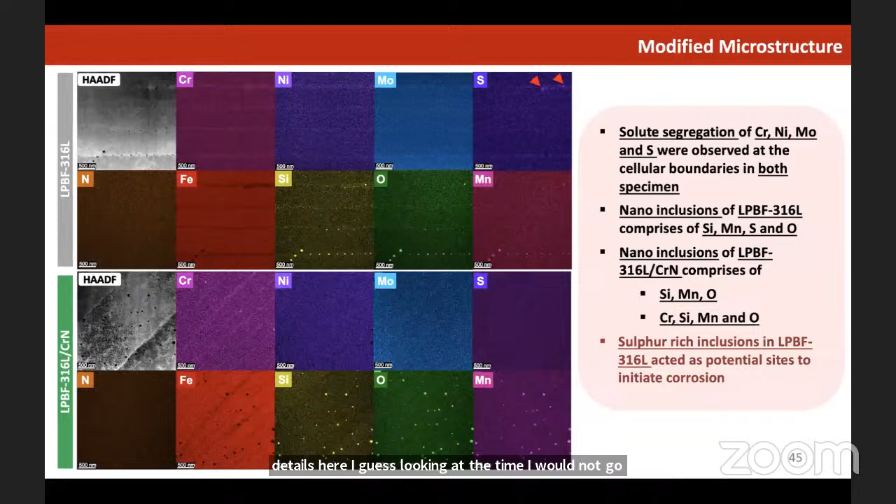So anyway, we did a bunch of other tests. Looking at the time, I will not go into a lot of detail here. I'll skip some slides. So we did lots of TEM and stuff, and tried to understand the corrosion mechanisms, which wasn't very easy. We learned quite a lot. Initially we thought that it's very easy: we put in lots of nitrogen that causes all the differences, but I think the mechanism is pretty different.

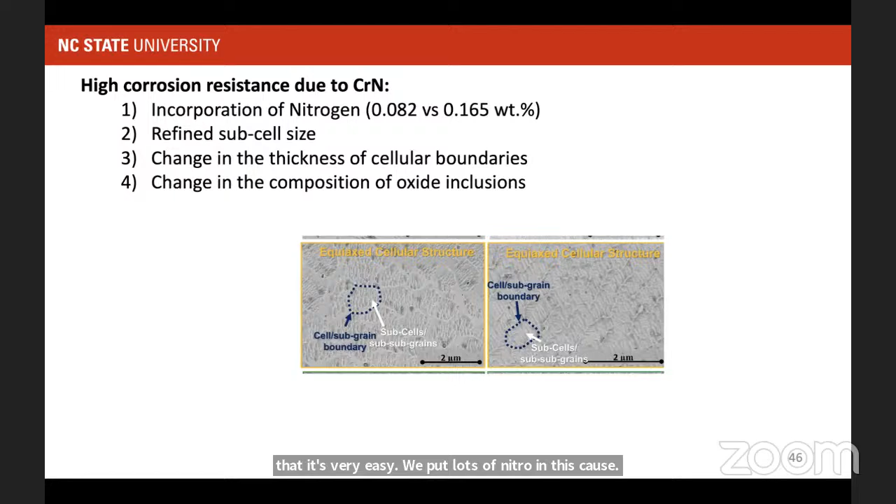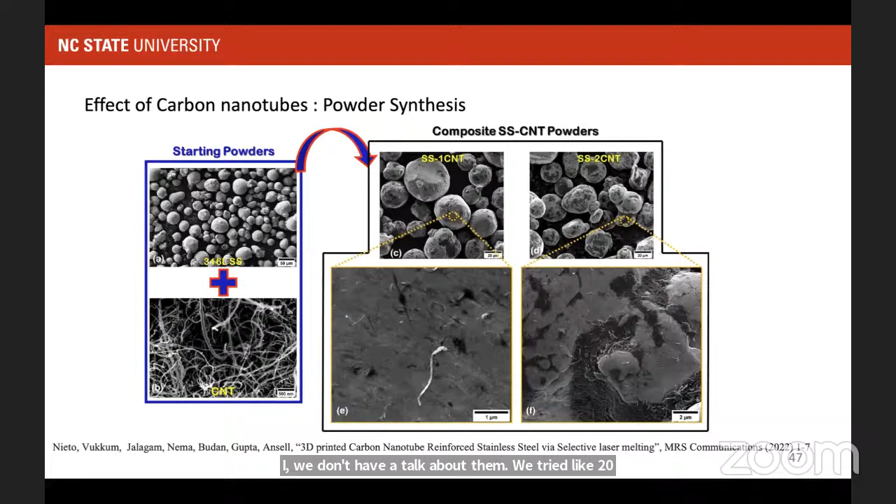Now we did some more work. We have a bunch of other additives. We don't have to talk about them. We tried like 20 different additives. Another one was carbon nanotubes. We tried to coat these materials with carbon nanotubes. Again, there was a whole different story, a different motivation for doing that study.

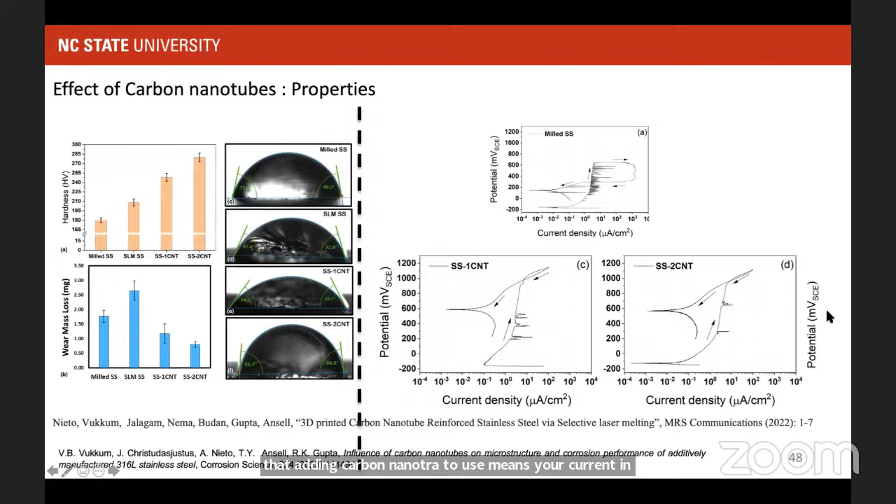Initially, I thought that adding carbon nanotubes means your corrosion performance would be really poor. But what we learned was they also increase the corrosion performance, quite a lot, pretty similar to chromium nitride. And that's where we started learning a little more about the other factors which could be contributing to the improved corrosion resistance, and that's where we learned that those small nano inclusions could be playing a very important role.

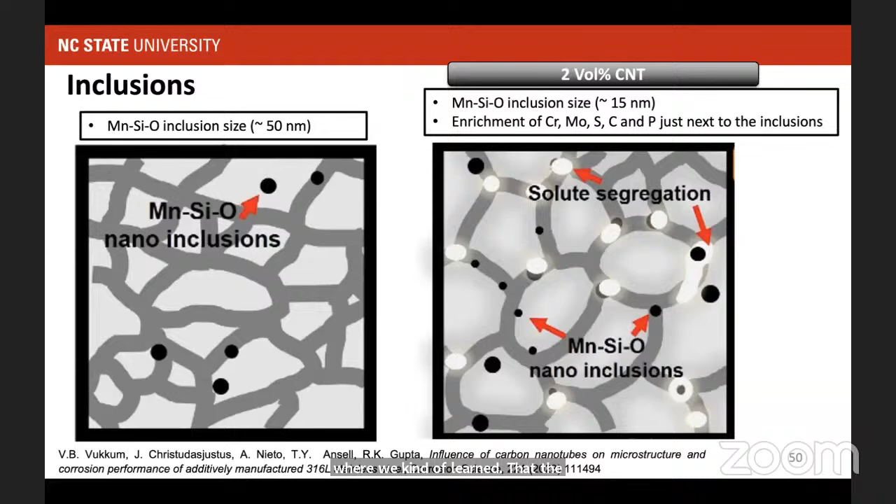We are probably not going into the whole discussion of these mechanisms. Each of them would probably be its own topic, to talk about for an hour or so. But what we learned from this work is that you can take the same chemical composition, but you can change the properties a lot by controlling the microstructure, right? And also, you don't necessarily need a homogeneous microstructure.

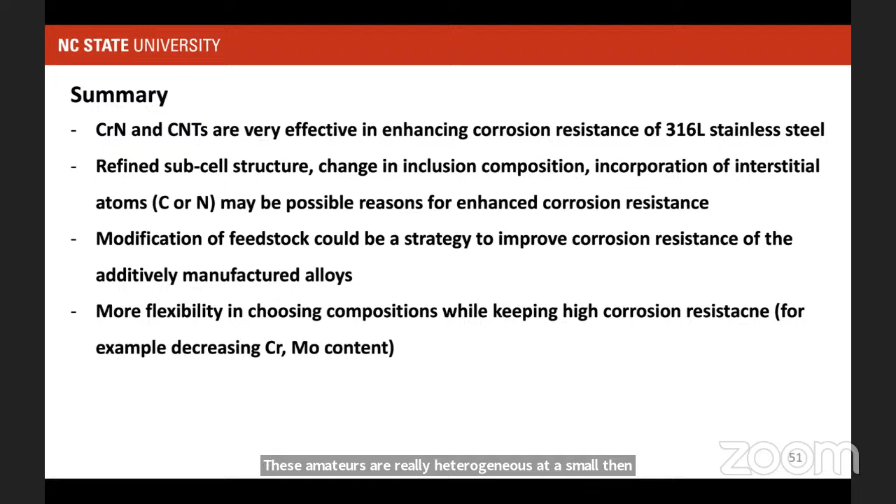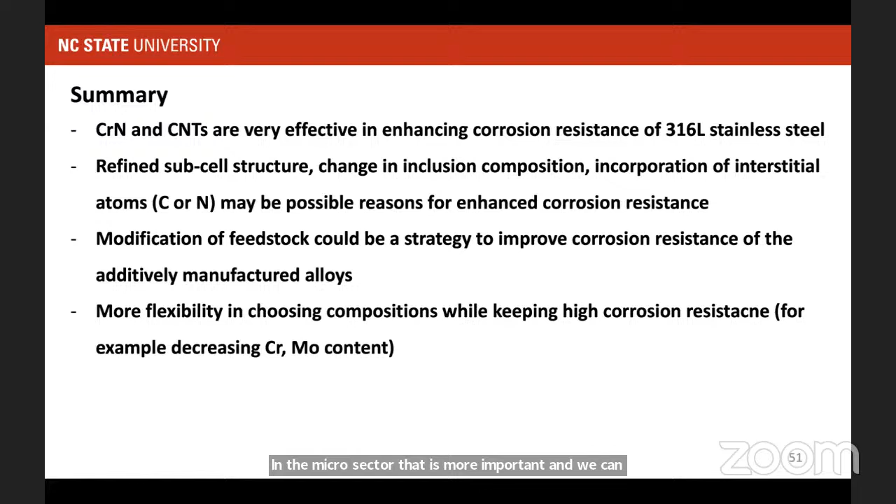So for the future, right now we are at the stage where we have advanced manufacturing techniques. We have new computational tools. We have really advanced characterization tools. So using those, we are in a position where we can explore whole new compositions. We really don't need to stick to the compositions we have, and for similar compositions you could probably design whole new microstructures, and we can go well beyond the conventional property limits.

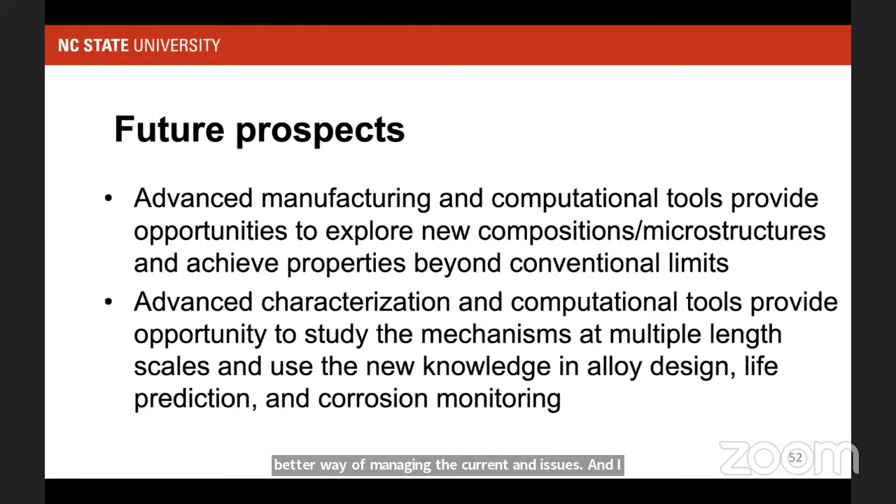And also a lot of the understanding we're developing with these tools helps us in predicting the life of materials, having a better way of managing corrosion issues. And for the future, I think we could probably change the whole material landscape we have available.